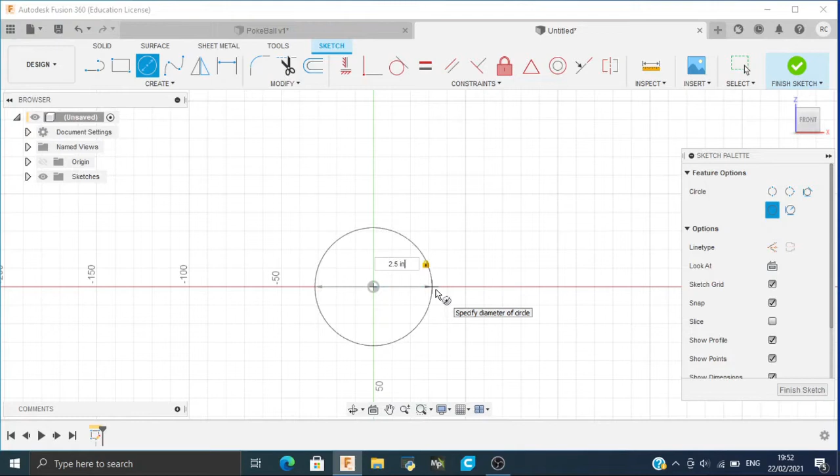First we'll choose our plane. I'm using a front plane to create circles for that Pokeball. So first I'll create a center circle of a diameter 2.5 inches, and I will split this into half. We'll be creating total 3 sketches, and the two will be the same but the diameters are different. Now finish sketch. Now we'll create a new sketch, and this time we'll turn off this sketch 1.

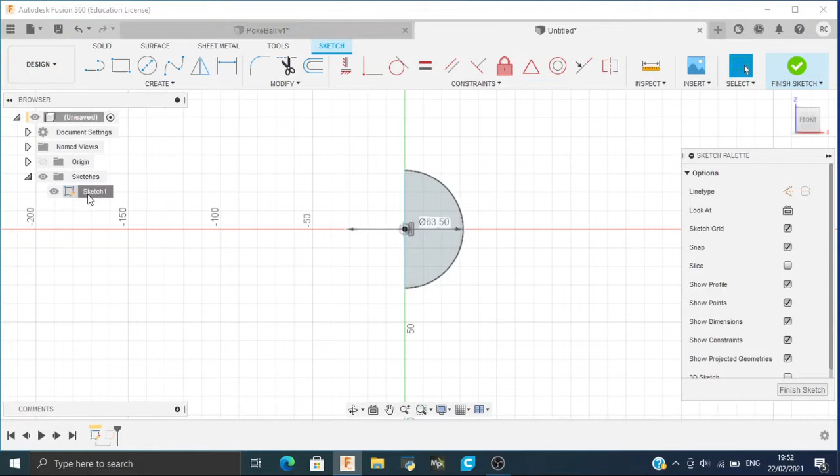Let's rename this. One minute. Yes. We'll rename this as outermost.

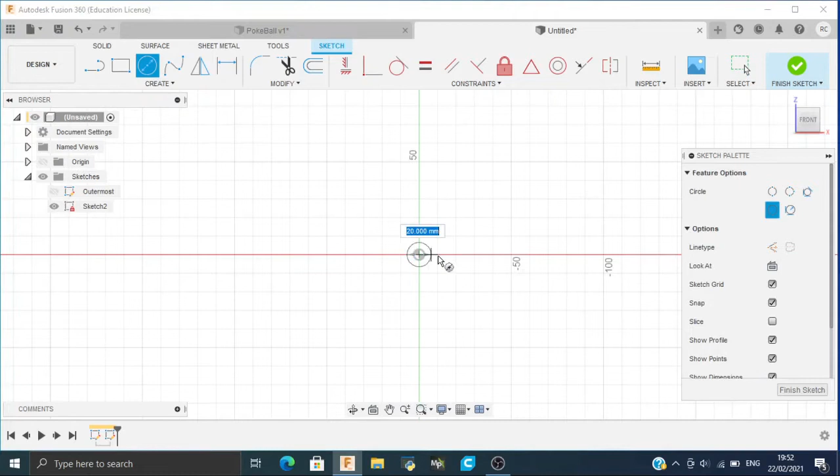Now we'll create a new sketch and turn off this. And in sketch 2 we'll be creating a center circle 2.4 inches as I have said. 2.4 inches. Again we'll split this into half and we'll trim the remaining part which is not of our use, and finish

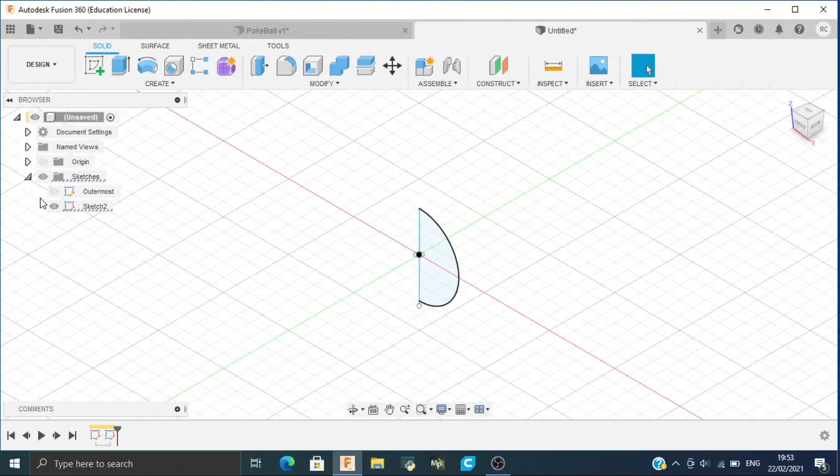sketch. And we'll create a new sketch again and turn off sketch 2, and this time we'll not be using center circle, we'll be using center rectangle, and the width will be 5.5 millimeters. Hit tab to switch. The length will be 3 inches.

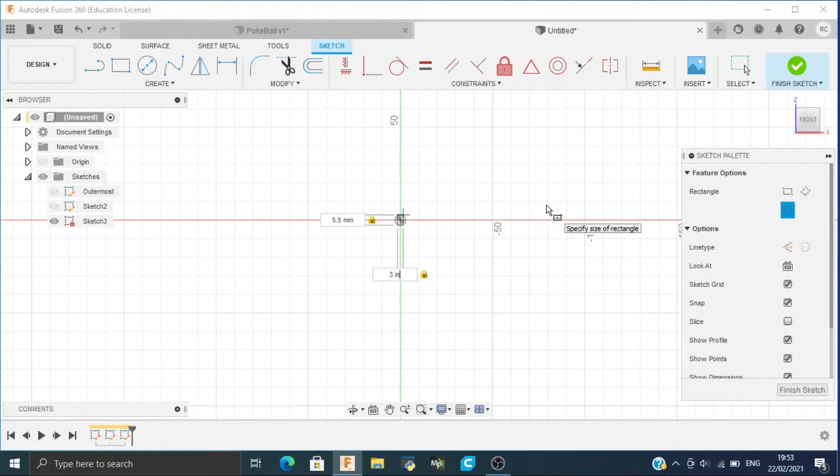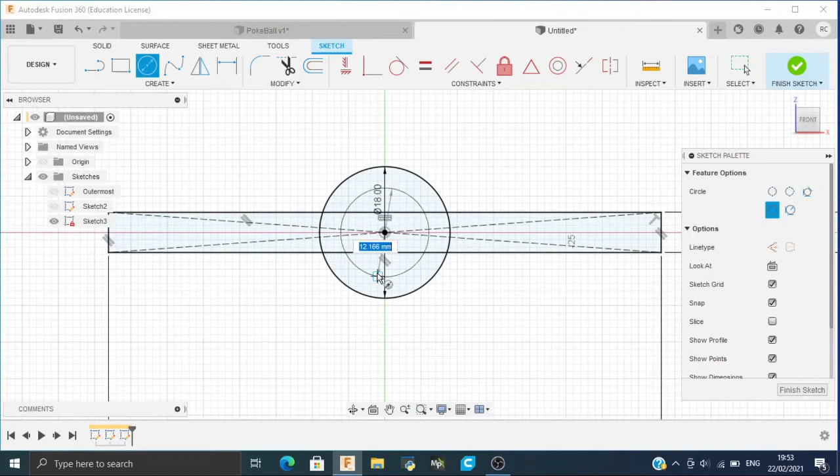Okay, now we'll be creating 3 circles for the release buttons. So first, draw a circle of diameter 18 mm, one more circle of 15 mm, and the last one of 10 mm. So we have done sketching.

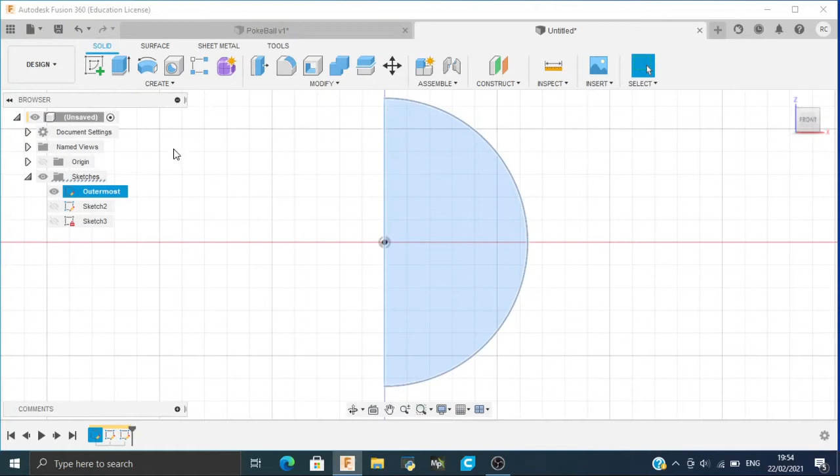Now we will turn our sketch into solid. So turn on the first sketch, which is outermost, and click on revolve, and we have to select profile and then axis. This will give you this result, and after this turn on sketch 3, and we have to cut this sketch

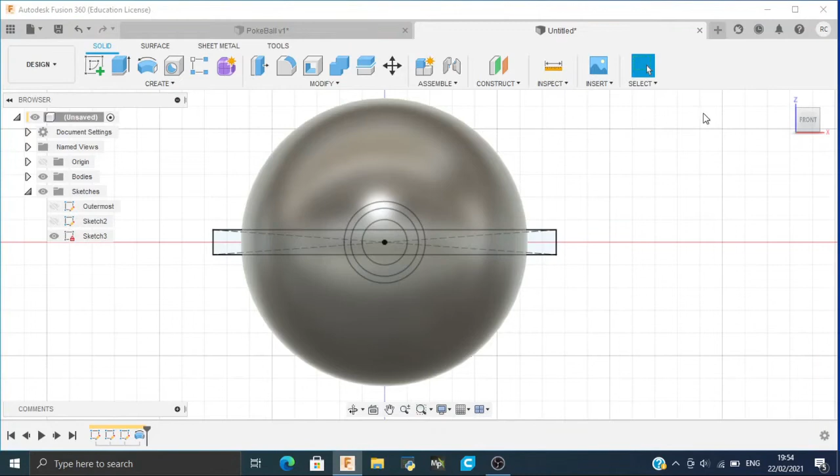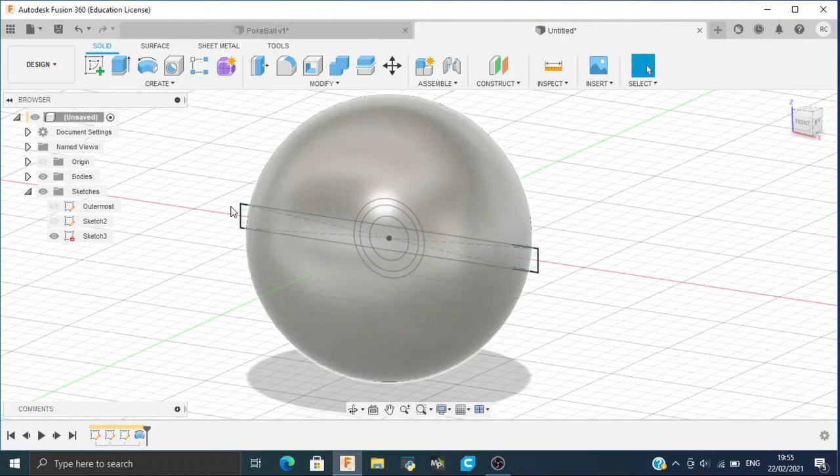in 2 sides. So first we will be extruding this whole sketch in front, and then we'll be extruding only the 15 or 10% of this sketch. So let's extrude this, switch off bodies, that will be easier for you. Select the whole and cut this off.

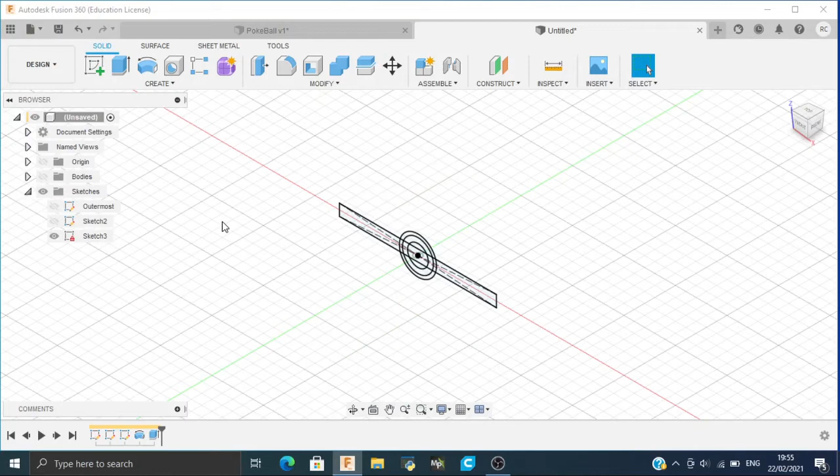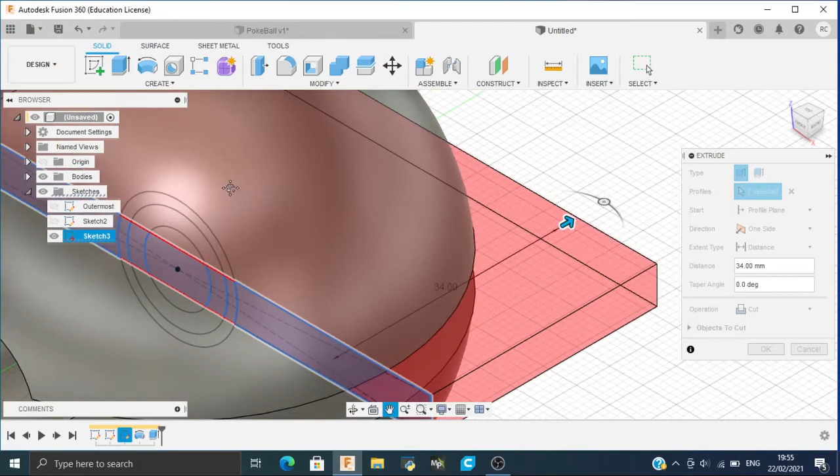We'll repeat the same. Switch off bodies, select sketch 3, and this time we'll be selecting only the rectangular portion. Let's extrude this, turn on bodies, and move the arrow backwards until it cuts. That's cut. So we have finished cutting.

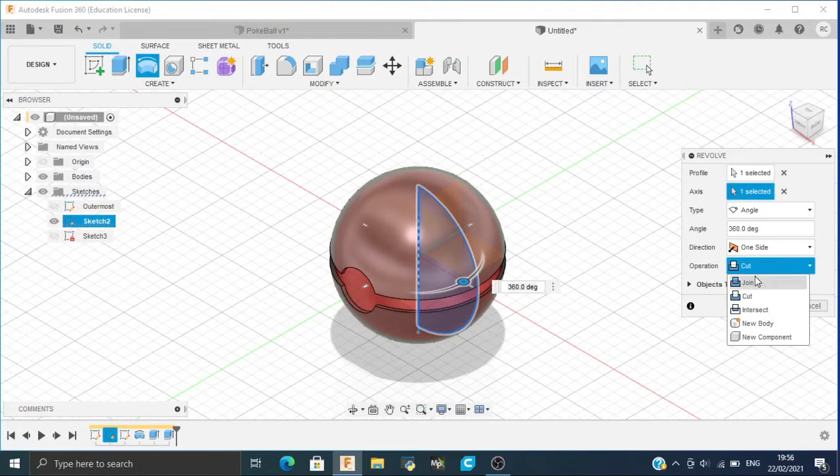Now we will turn on sketch 2 and turn off bodies, and we will revolve this sketch 2. So it will be creating an inner portion for that ball, and make sure that your operation is join, not cut. After that we'll be extruding the circles for these release buttons. So switch off bodies so you can select easily.

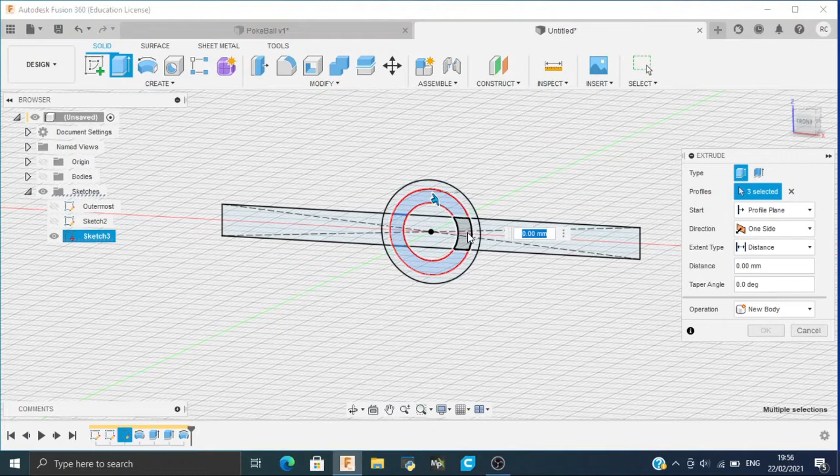Select the middle circle first, then turn on bodies, otherwise it will not show you. You have to just eyeball it. I don't have any particular dimensions for it. I think minus 31 will be okay. And change the operation to join.

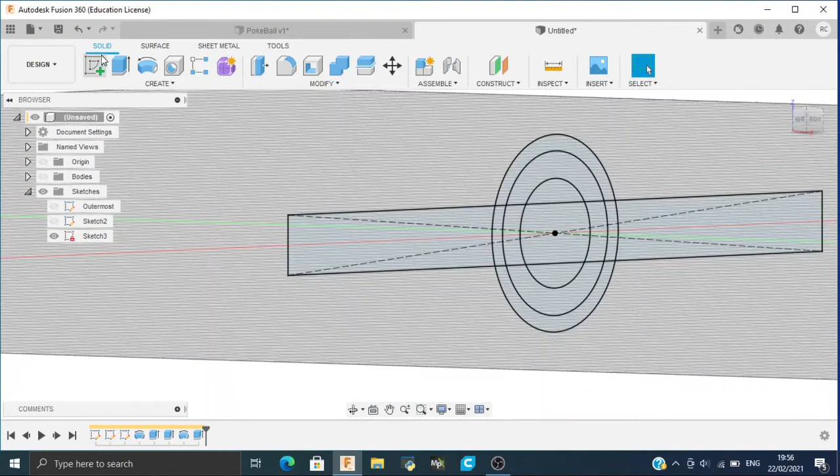We will repeat the same for the inner circle. Switch off bodies. Click on extrude. Select the center innermost circle. And for this, I think

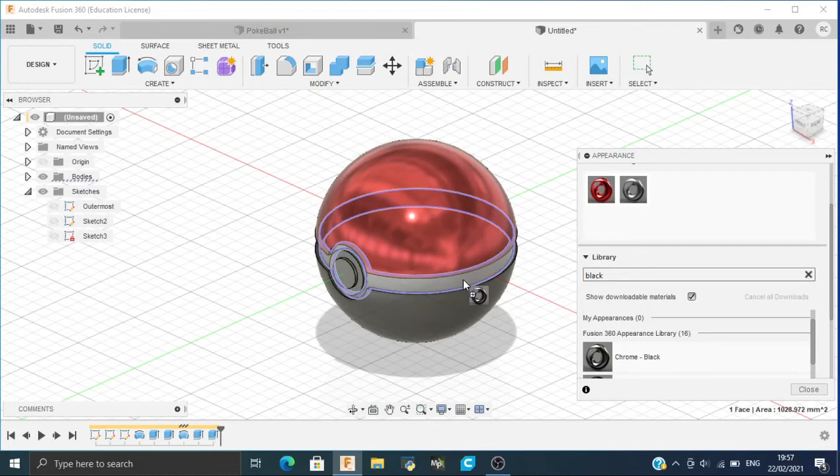gray or white. So first we'll be coloring the lower portion as white. Now select the release buttons and type here white. LED, you can see this LED SMD 3528 and so on. So drag this to that selected portion. That's not selected, I think.

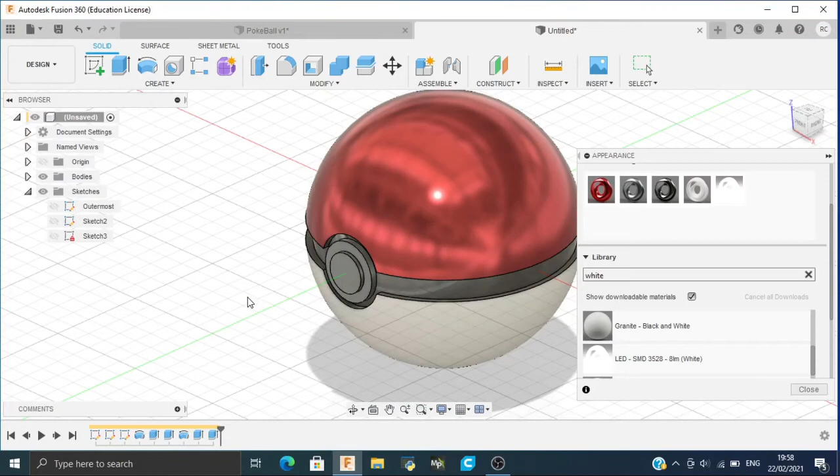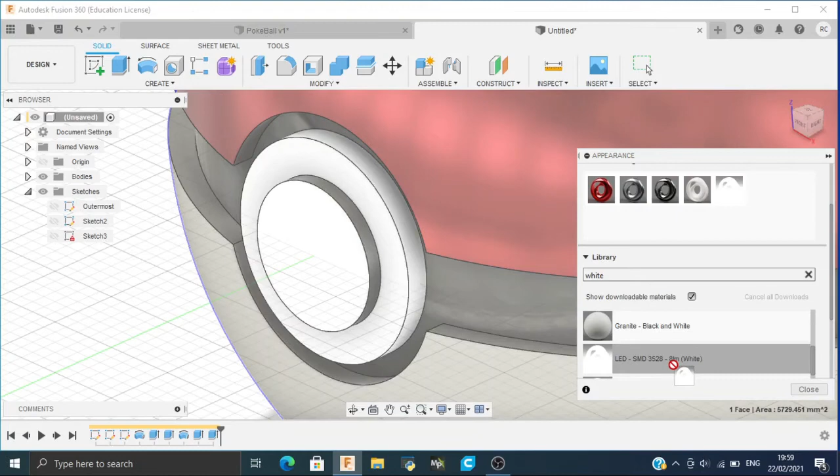After coloring it, it will look more beautiful, much better. The last faces. Here it will be pretty hard for you to select the face, so make sure that you have selected that face only. I'm having trouble in this, so I will close this and choose repeat appearance, and now I will select this LED. So we have done coloring our Pokeball.

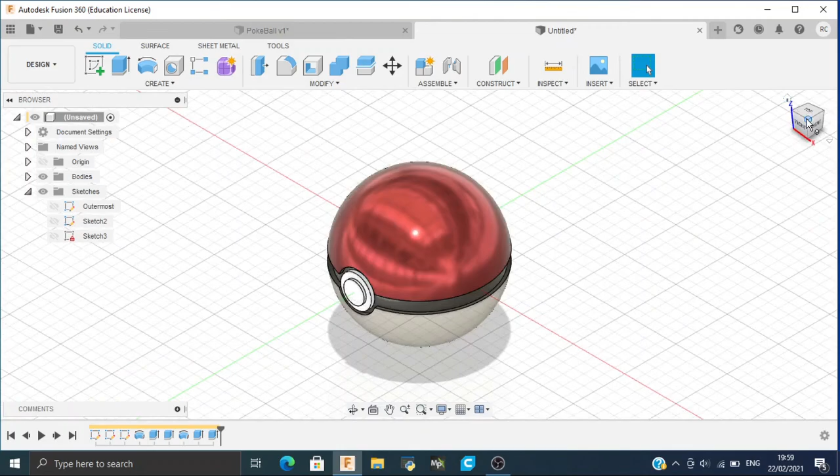Check that you have properly colored it and you are satisfied with the colors. If not, you can change them as per your choice.